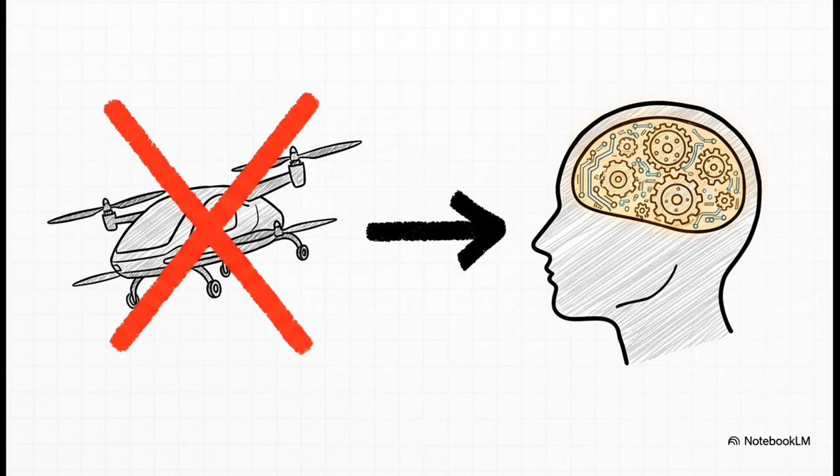We've been promised flying cars for decades, right? It feels like they're always just around the corner. So let's start with the big question. Why aren't they filling our skies right now? Well, the answer might actually surprise you. The biggest roadblock wasn't about wings or fancy materials. It's not about the flying at all. It's about the thinking. We're talking about the incredible, mind-boggling complexity of the control system that's needed to make these things safe, reliable, and just plain efficient.

And that is exactly where the P-13 modular concept comes into the picture. What you're looking at is a totally radical design for a hybrid eVTOL, that's an electric vertical takeoff and landing vehicle. It's built from the ground up to solve the core problems holding this whole industry back. And the real key, the secret sauce, is the brain that connects its two modules, a combined vehicle control unit and flight control computer, or as we call it, the VCU/FCC.

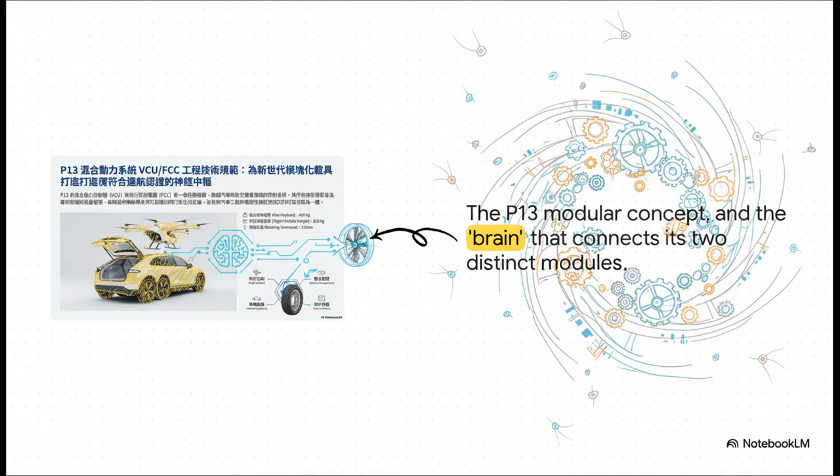You see, the whole industry is basically hitting its head against two giant walls. The first is what we call the battery energy density bottleneck. Put simply, batteries just can't store enough energy yet to give us long, practical flights. The second wall, a massive lack of charging infrastructure. I mean, where are you going to plug all these things?

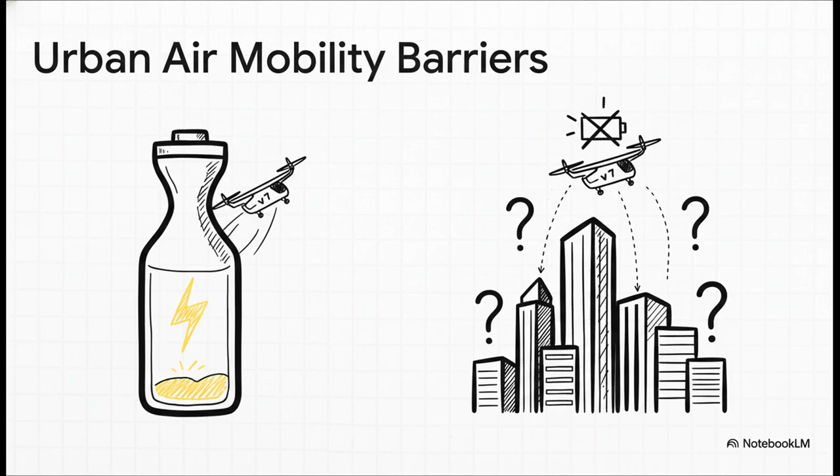So how do you solve a problem that seems, well, unsolvable? You don't. You reframe it. And that brings us to the master plan behind the P-13, its absolutely radical modular solution.

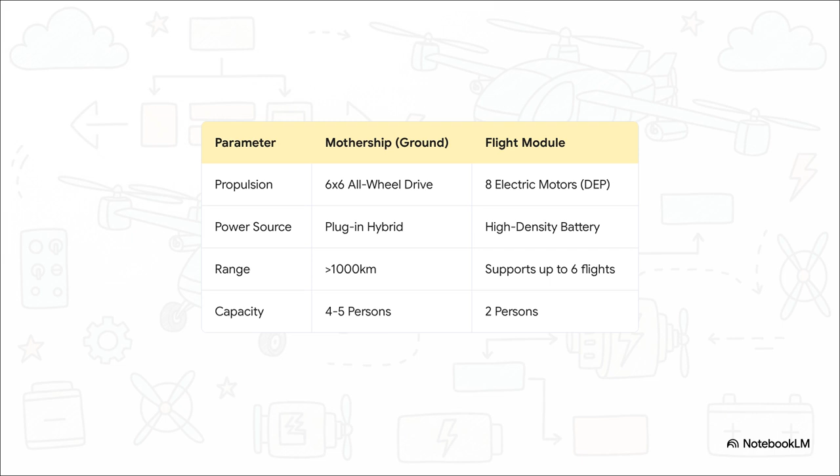Here's where it gets really clever. Look at this breakdown. The designers separated the functions into two totally distinct, specialized modules. You've got the mothership, a long-range hybrid vehicle for the road, and then you have the flight module, a short-range, pure electric aircraft for the sky. By splitting these jobs, the P-13 just brilliantly sidesteps both the battery problem and the infrastructure problem in one go.

But as you can imagine, this really elegant architectural solution creates one heck of an engineering challenge. You have to build a single, unified brain that can master two completely different worlds, the fast-paced world of automotive and the hyper-precise world of aerospace. And each of those worlds has its own incredibly strict safety standards. So how on earth did the engineers pull this off? Let's pop the hood and go inside the digital brain to really break down its layered architecture.

Okay, at the very top, you have the L1 strategy layer. This is the flight control computer, the FCC. Think of it as the pilot's co-pilot. It's handling the big picture stuff: where are we going and how do we stay stable and safe? To guarantee that safety, it uses a triplex redundant architecture. That means you have three independent computers constantly checking each other's work. If one gives a different answer, the other two overrule it. It is the absolute gold standard in aviation.

Right below that, you've got the L2 tactical layer. This is the vehicle control unit, or VCU. I like to call this the energy maestro. It's managing the complex dance of power from the engine and the batteries, making decisions millisecond by millisecond. For reliability, it uses a dual duplex architecture. That's basically one system doing all the work with an identical twin on hot standby, ready to take over instantly if anything goes wrong. And this diagram shows how it all fits together.

You can see that perfect hierarchy we just talked about. Strategy, the FCC at the top. Tactics, the VCU in the middle. And execution, the motor controllers at the bottom. Now, this strict separation is absolutely critical.

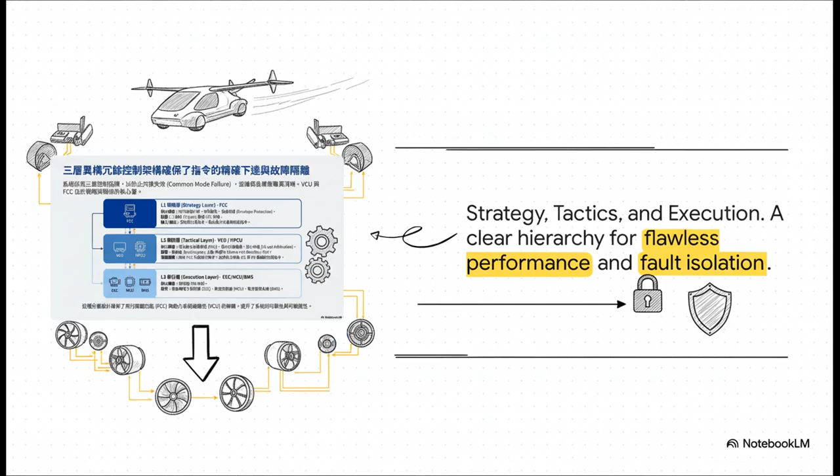It creates what we call fault isolation. That means a problem in one layer, say a motor fails, can't cascade up and crash the whole system. Every part has its job and only its job. It's the very core of a safe, robust design.

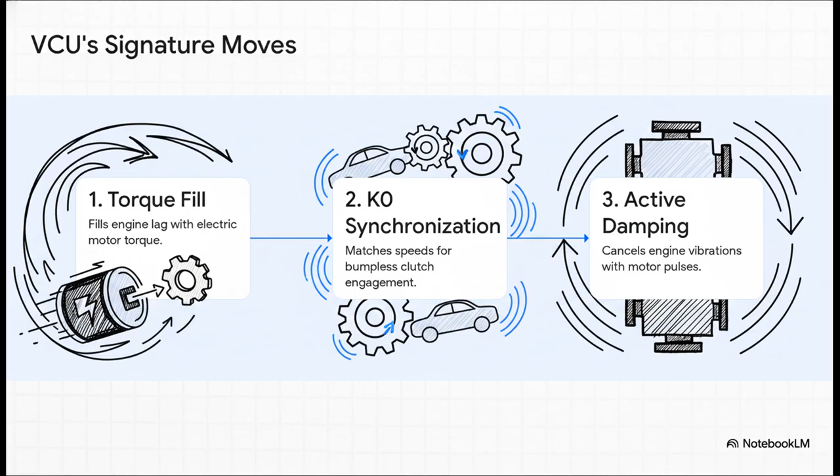So now that we get the architecture, let's see what it can actually do. It's time to watch this seamless power dance that the VCU performs. The real genius of the VCU can be seen in three signature moves that show off its incredible speed and precision: torque fill, K0 synchronization, and active vibration damping.

First up, torque fill. You know that tiny delay you feel when you step on the gas in a regular car, that turbo lag? Well, the VCU sees that coming from the engine, and in less than 10 milliseconds, faster than you can blink, it tells the electric motor to instantly fill that power gap. The result? The pilot just feels one smooth, perfectly linear push of power.

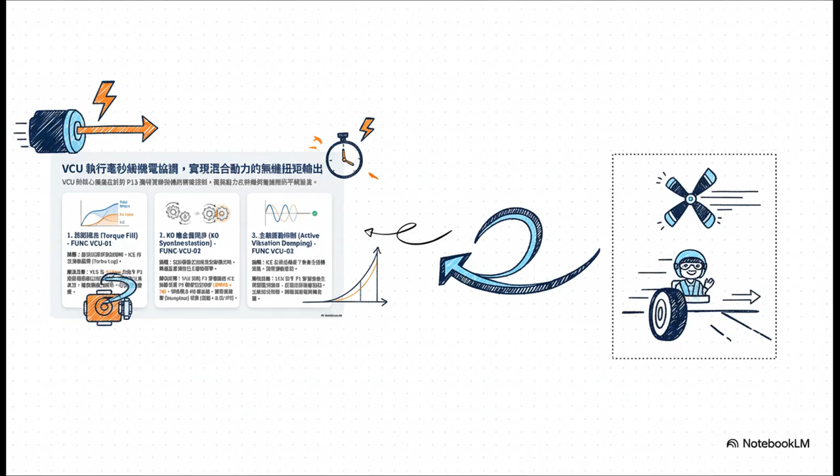It's seamless. Next is K0 synchronization. This is when the engine needs to connect to the propellers while you're already in the air. If you get this wrong, you'd create a huge, jarring shock wave through the whole aircraft. So to prevent that, the VCU has to match the speeds of the two spinning shafts to within just 10 RPM. That is surgical precision. And it does it so perfectly that the transition is completely unnoticeable.

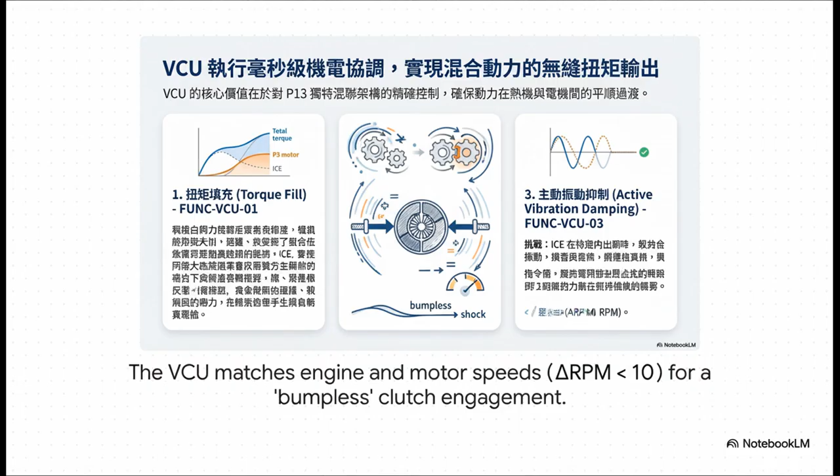Performance is cool, but in my world, in aviation, safety is absolutely everything. So let's look at the foundation of trust for this entire system, its fortress of redundancy. The whole design philosophy starts and ends with this single, non-negotiable requirement: the probability of a catastrophic failure must be less than 1 in a billion per flight hour. Let that sink in. That is the exact same standard that every commercial airliner you've ever flown on is held to. It's the bedrock of building the public trust we need to make this industry fly.

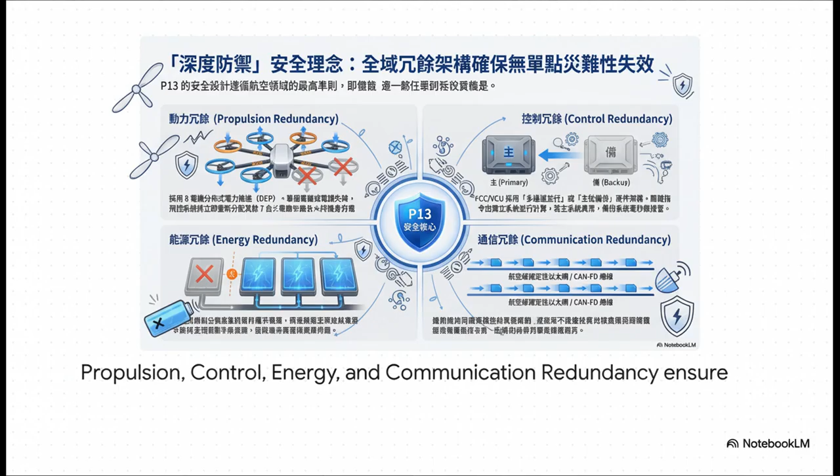So how do you hit a number that incredible? You do it with the strategy called defense in depth. It rests on 4 main pillars. First, propulsion redundancy. It can lose a motor and still fly fine. Second, control redundancy, that's the primary and backup systems we talked about. Third, energy redundancy, using separate partitioned batteries. And finally, communication redundancy, with multiple data paths. The main takeaway here is simple: there is no single point of failure in this entire design.

Now this is what makes this VCU/FCC so unique. It has to meet the absolute highest safety standards from 2 different worlds at the same time. On the automotive side, that's the top ASIL D standard. And on the aerospace side, it has to meet the level A standards for both software and hardware, which is the most stringent level you can possibly have. Fusing these 2 incredibly demanding philosophies is what makes this system so unbelievably robust.

But look, a blueprint is just a promise, and that promise has to be proven. So let's look at the gauntlet of testing the VCU/FCC has to survive to earn its wings. Verification follows this rigorous process called the V model, which moves step by step from pure software all the way to physical reality. You start with processor in the loop, testing the code on the actual computer chip. Then hardware in the loop, where you connect the real controller to a full flight simulator. Next is the Copper Bird, a test rig for all the wiring to check for interference. And finally, the Iron Bird, a full-scale ground replica with all the heavy metal of the powertrain, making sure it all works together before it ever leaves the ground.

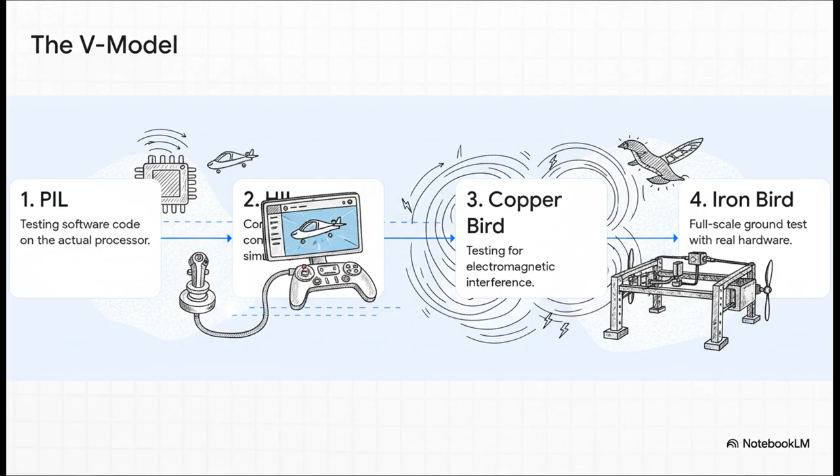In the end, success isn't just a feeling, it's a set of hard, quantifiable numbers. These are the key targets it has to hit: real-time performance has to be under 10 milliseconds, system availability under 5 seconds, if a fault happens it has to recover in less than 20 milliseconds, and software integrity demands 100% code coverage. There's no gray area. Meeting these numbers is what earns you the right to fly.

So when you look at all of this, the elegant architecture, the layered safety, the exhaustive verification, it all leads to one conclusion. From an engineering standpoint, the digital brain is ready. It's here. The only real question left is: is the world ready for the flying car?